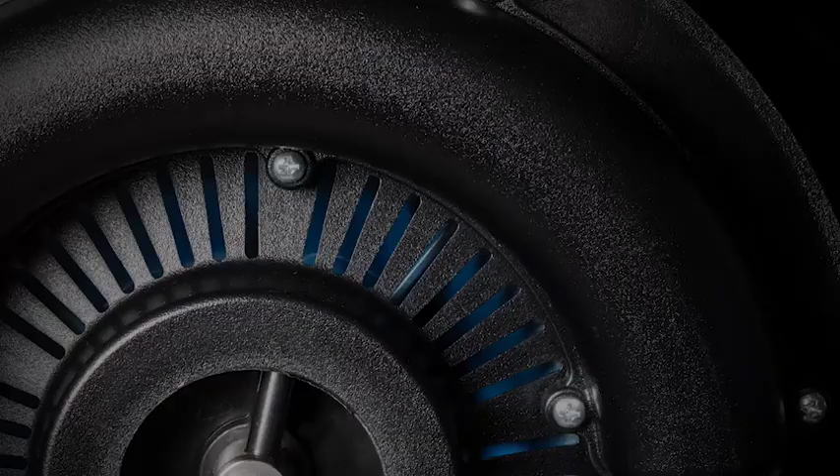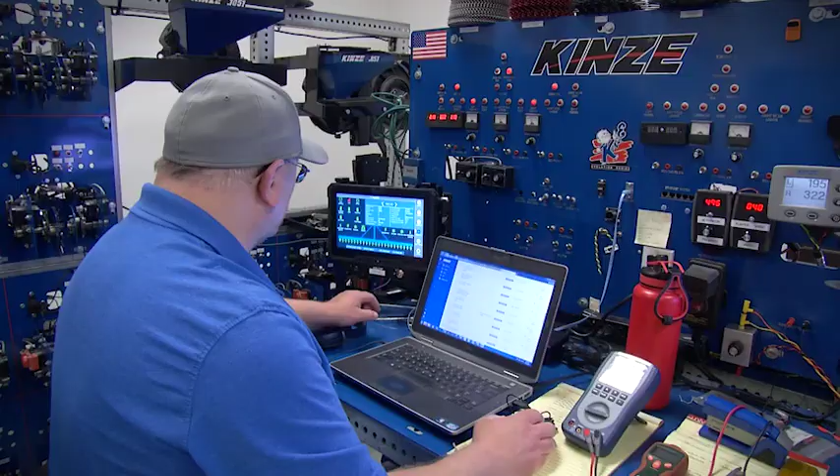They say necessity is the mother of invention, and nowhere is it truer than in farming. Farmers have always been on the search for a better way, noticing a problem and finding an answer. Generation after generation, more than anything else, innovation has to do with listening, then finding an effective solution. That's the foundation of KINZE.

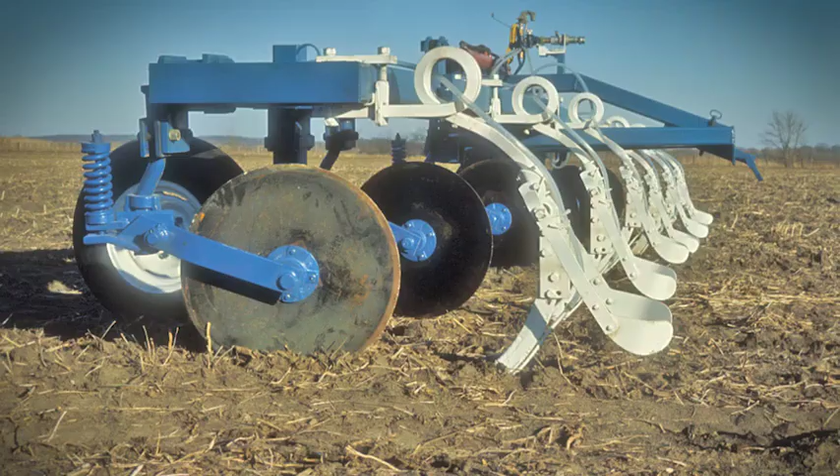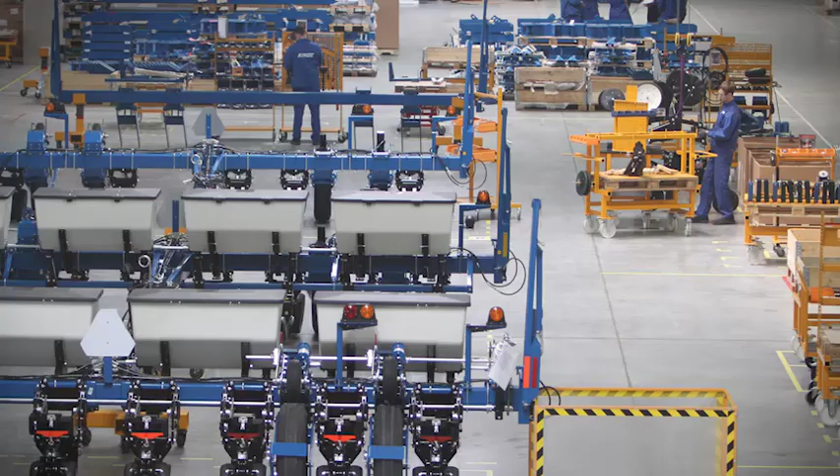It started with one man with a God-given talent to create, and a repair shop equipped with basic tools. But by listening to farmers' wants and needs and responding with smart and simple inventions, KINZE delivered better solutions to the farmer. Today, KINZE has grown to an international company, and it continues to carry on its founder's philosophy. Like most farms, it's still a family business.

Now, in the next generation of leaders, providing next-generation technology, while operating with the same core values it started with in 1965, conducting themselves in the highest ethical manner in all relationships, hearing the customer's current and future challenges, always asking, how can we do it better? Responding with creative breakthroughs, all in a culture that realizes people are the greatest asset.

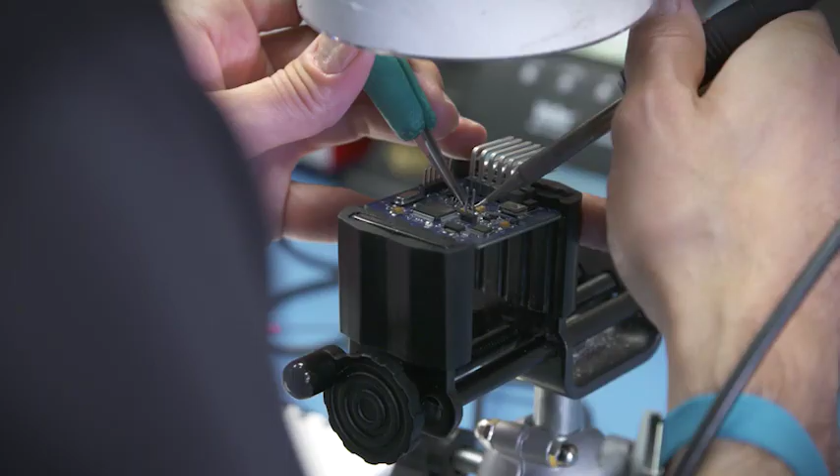Technology, ourselves, you name it, we push it. Join us on a special journey from what if to what is, where precision for every customer is personal. And see what can happen when an innovator and the company that's his legacy never stop asking what if. Because farmers won't either.

They started centuries ago, spreading seed on the open ground, then letting nature take its course. The first man-made planter invention? It wasn't really a giant step forward, simply a crude wooden and steel crafted tool to make it easier for the farmer to singulate seeds once again by hand.

Then they discovered the power and efficiency of horsepower and started pulling one-row planters through the field with mules or horses. When they hitched up a team of horses, they not only increased horsepower, but they also figured a way for two men to first mark the fields into 36 and 40-inch checkerboard patterns, then come back and plant each seed simply by pulling a latch that released the seed.

Everyone starts somewhere. For John Kinzenbaugh, it started in Ladora, Iowa, in a 1,500-square-foot building with a lot of small repair jobs, fixing broken hitches, loader frames, leaky hydraulic pumps, overhauling trucks and farm tractors, even something as simple as drilling a new hole for a hitch.

I had a guy that came in with a used piece of steel. It was a drawbar out of an old tractor, and he wanted a 1.25-inch hole drilled in it. And I took a brand new 1.25-inch drill bit and drilled a hole in that drawbar, which had some hardening effect. And I nearly ruined the $10 drill bit, and I charged him probably $5 for drilling that hole.

And I had one customer scold me for nearly ruining the bit and not charging enough to even pay for the drill bit. But within a month, those guys had brought back a tractor to overhaul and some other work, and we'd done around $500 worth of work for those guys. That's how work comes back to a small shop, is by word of mouth. One satisfied customer leads to another.

Within just a few years, KINZE Welding had expanded into repowered tractors. And to demonstrate them, they did custom anhydrous applications. That led to the development of a unique 13-shank anhydrous applicator and John's very first mass-produced product.

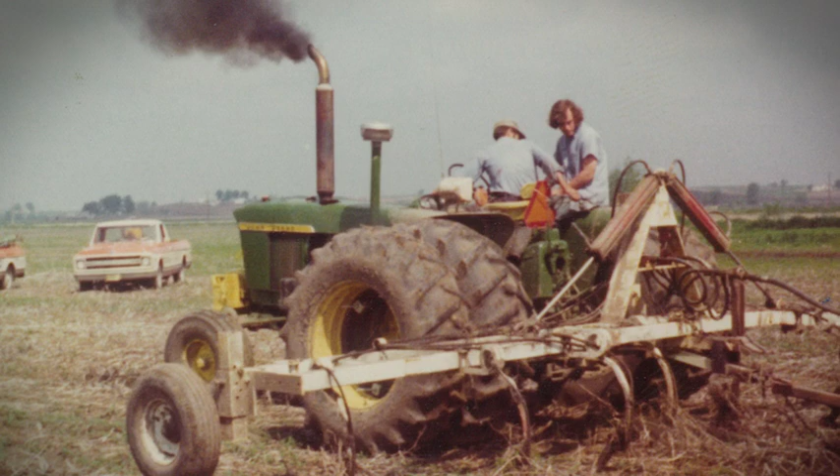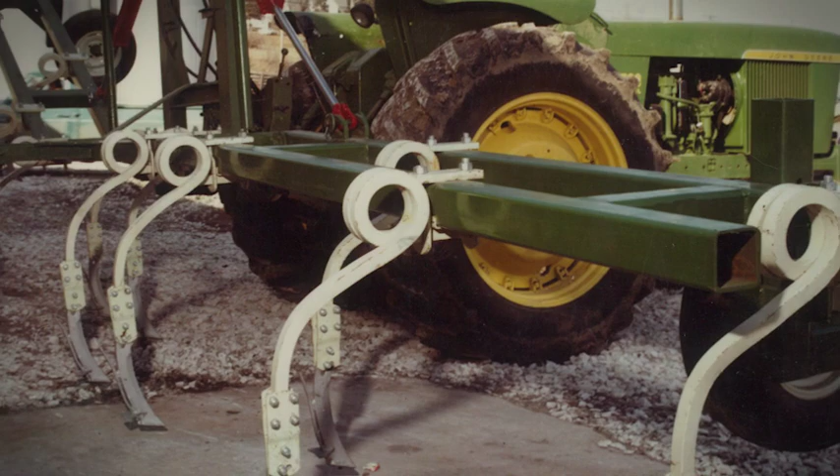As a result of the need for horsepower, the need for demonstrating the horsepower, we started custom applying anhydrous ammonia for the local fertilizer dealer. And we would go out and do 2,000 or 3,000 acres of custom application with one of the repowered tractors, and the 13-knife anhydrous bars that we built were unheard of in size.

One year later, John started focusing his attention on solving another customer problem: moving grain from the combine to the truck. A local customer needed a way of getting the corn away from the combine. His frustration, and others', was that in wet conditions they couldn't get the truck into the field, and if you were hauling corn any distance at all, four-wheel wagons were becoming too slow on the road. He wanted the ability to load his truck, which held right at 400 bushel, quick and easy, and keep it out on the road rather than in the muddy field.

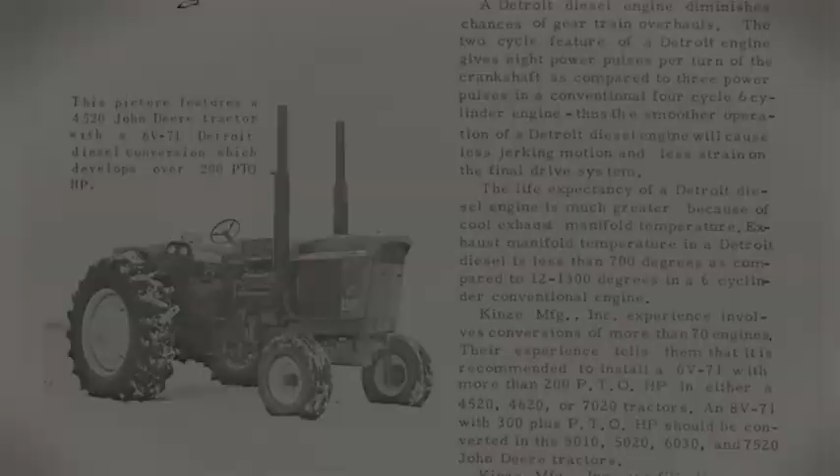As tractor horsepower increased, so did Jon's interest in demonstrating his popular repowers, this time with the John Deere 5020. The famous old way of demonstrating horsepower was to pull a moldboard plow.

So I went to Steinerson's here in Conroy and priced a new 7-bottom plow, and they wanted to know if I wanted a 16-inch cut or an 18-inch cut. I said, well, that's a good question. Ed Steinerson said, we don't need to decide whether it's a 16 or an 18 — we can order the plow in and set it up the way you want. I said, well, what do you mean? It has to have a longer frame, the backbone of the plow has to be longer.

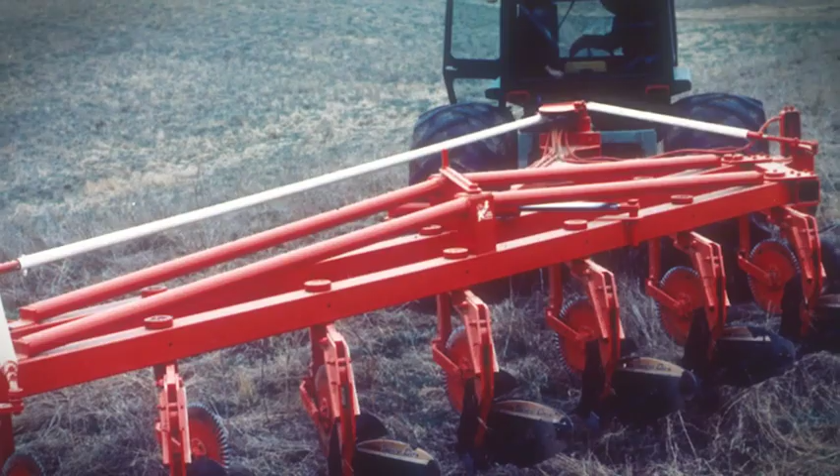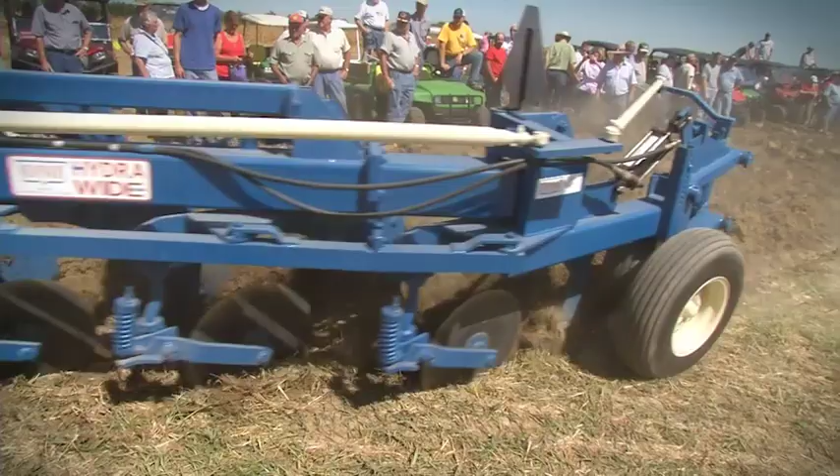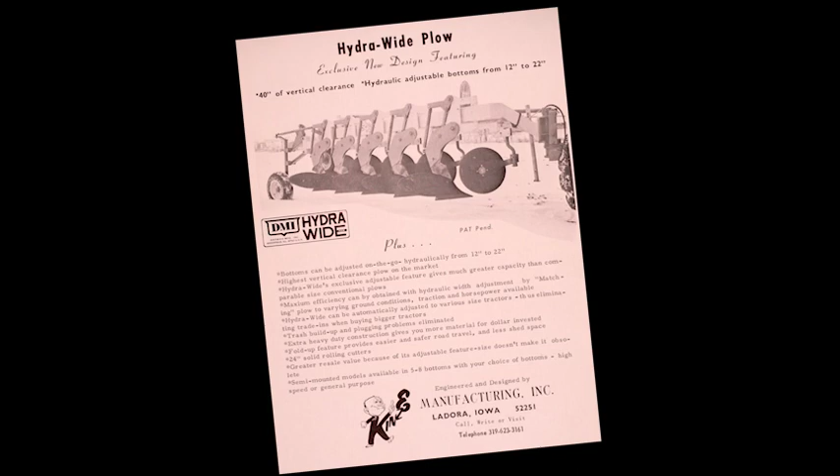He said, no, it's the angle that the bottoms are attached to the backbone that determines the width. And just like a light bulb coming on, it clicked into my mind that if we could pivot those bottoms without taking bolts out, but on a pivot instead, we could adjust the plow infinitely. I realized this was something that could be patented, and so my first patent was on an adjustable cut moldboard plow. In the summer of '71, I took the plow and drawings and pictures of it and went out and met Bill Dietrich for the first time.

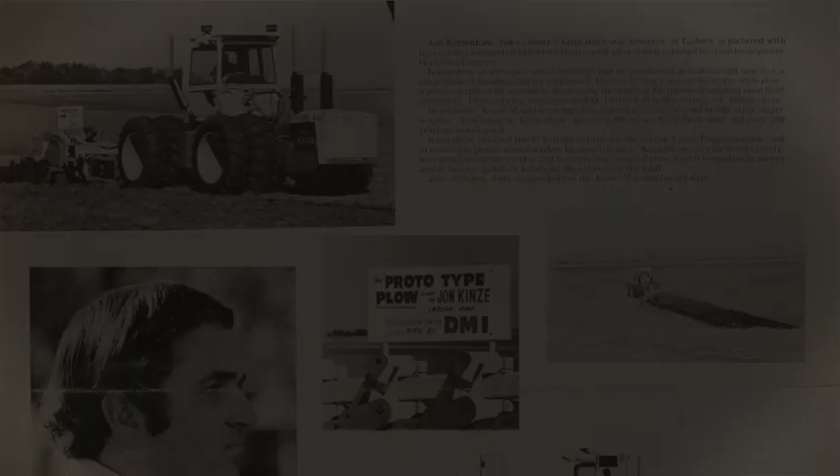One year later, Jon was back at DMI talking to Mr. Dietrich about 12-bottom plows and a lot more power. I sketched on a napkin at the restaurant how I would hook the two 6-bottom plows together — the front part was pull type and the back part was like a mounted plow that attached. He agreed that would be a good way to do it, and he would furnish the 6-bottom plow frames if I would join the two together. Then he right away wanted to know, what are we going to pull it with? I said, well, that's a good question. But jokingly, I said, you know, we could hook two 5020s together and pull it with two tractors.

In the fall of '74, I was getting close to getting it finished. I can remember two or three John Deere engineers came by the shop the week before the Farm Progress show, and they commented it sure would be a show stealer if we had it ready for the show. They didn't think there was any way it would show up at that Farm Progress show four or five days later, but it did.

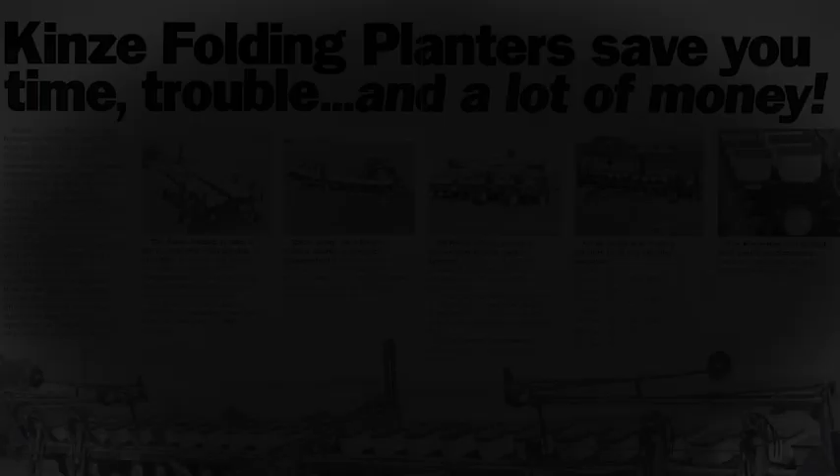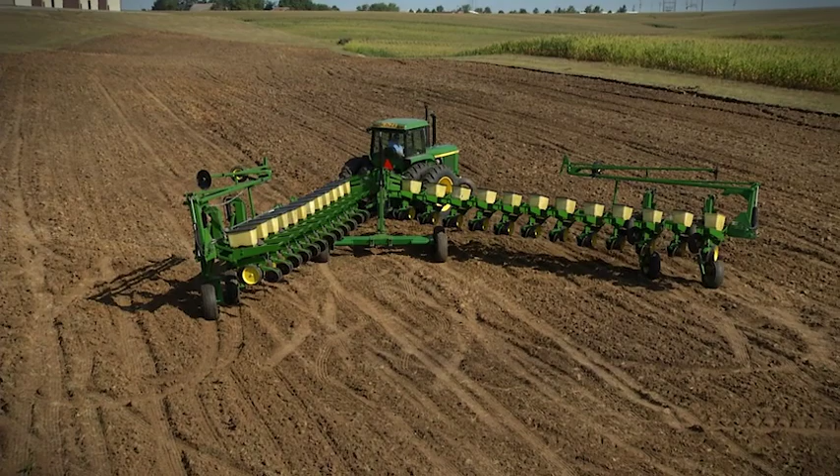The year was 1975, 10 years after Jon opened his 1,500 square foot welding shop. Planters were getting bigger, and no one had come up with a fast, easy way to transport them from field to field. In 1975, a farmer from southern Iowa came through and made a comment that somebody should figure out how to fold a big planter. The fact that you folded a planter up vertically was spilling seed and insecticide, and it just wasn't a good way to transport or pull a planter in most Midwestern fields. So I started looking at a way to take a 12-row or 16-row planter and fold it horizontally. It was clearly a need for that folding invention.

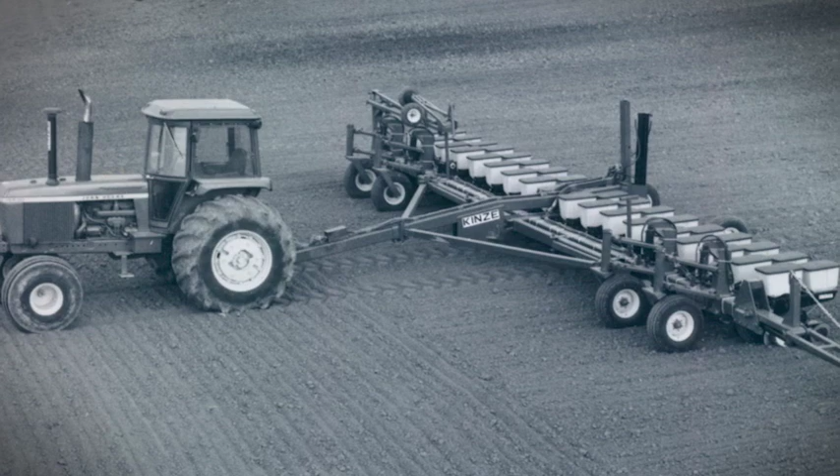By 1977, new John Deere MaxEmerge row units were setting the standard for accurate seed placement and depth control, and Kinze was mounting them on the majority of their newly patented rear-folding toolbars. But when Deere decided to limit Kinze's access to their MaxEmerge row units, and Kinze decided to build their own, that's when things really got interesting.

In approximately 1981, there seemed to be a need for smaller planters, and since we had solved the row unit issue and could build as many as we needed, we introduced 4- and 6-row planters. At that same time, it was apparent that narrow-row soybeans planted with a planter were much better than planting with a grain drill, so we developed what we called the double frame planter.

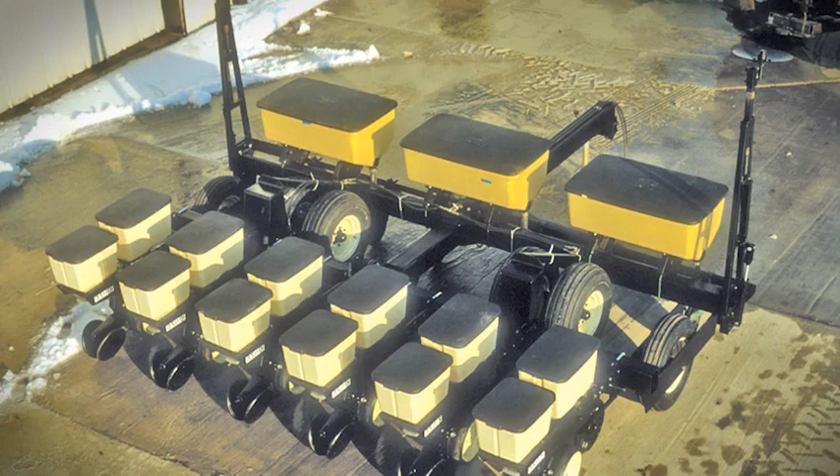On the back bar, it was wide open to have row units spaced as close as 15 inches. And then we could plant 15-inch soybeans with the same planter that we planted corn.

In 1983, it was obvious that we could use a better way of putting the interplants on the bar. We decided that we would stagger the rows.

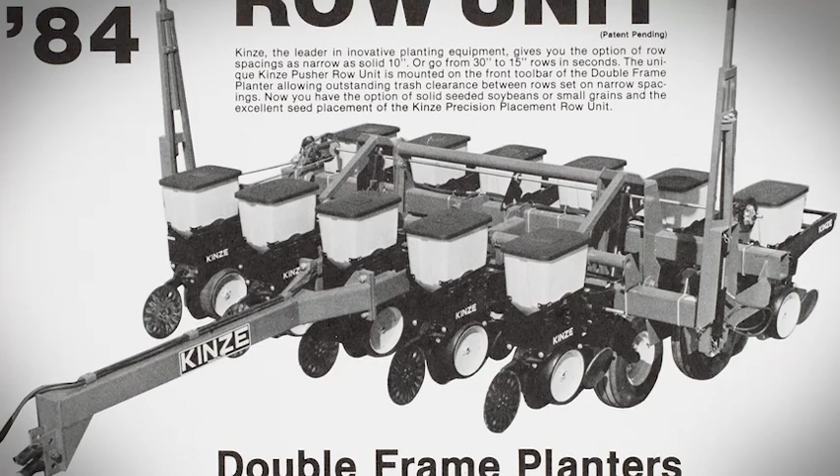It occurred to me a few days before the Farm Progress Show in 1983 that we could build that row unit and push it from the rear. The patent called it a rear-driven row unit, but it basically has the gauge wheels up front, and by putting the parallel linkage at the back side, we could push that row unit like you'd push a wheelbarrow.

It was a simple concept, easy to do. It was patented, universally accepted by farmers, and before long, it led to the next KINZE innovation, the pivot fold planter for 6, 8, 12, and 16-row toolbars.

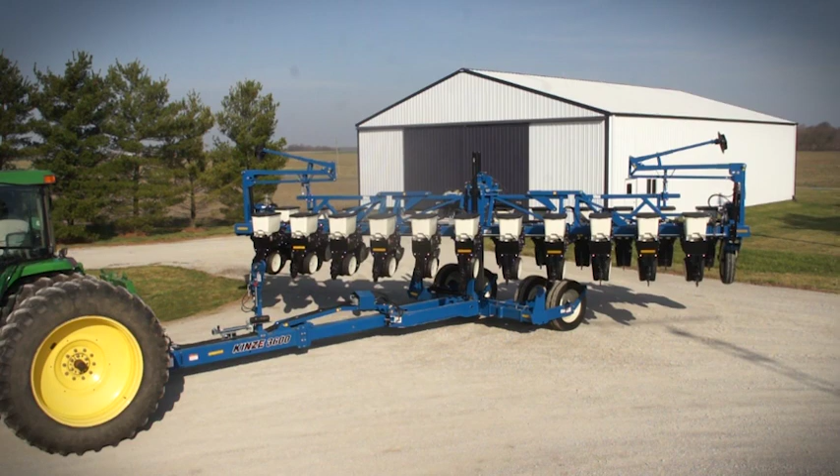So it occurred to me that if we could build the planter that would raise and one end rotate forward, the other end rotate backwards, it was basically a central rotation of the bar, and we could lock the frame rigid so that it did not flex.

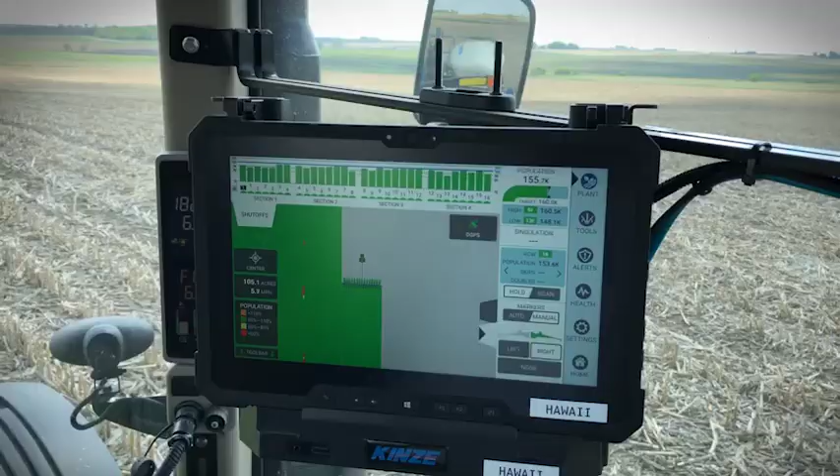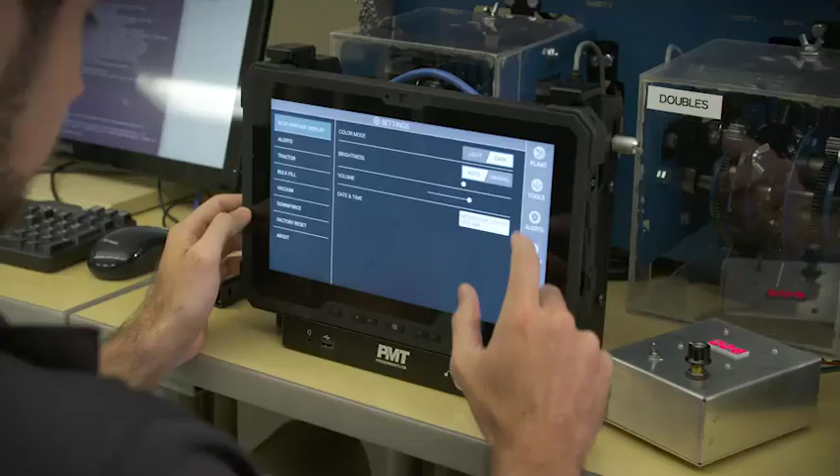KINZE innovation continues for the next generation. Our company is bigger and, dare we say, even better. A place where game-changing solutions are born, creating the next wave of cutting-edge technologies. Right here, right now. As long as there is KINZE, the gold standard will not be red or green.

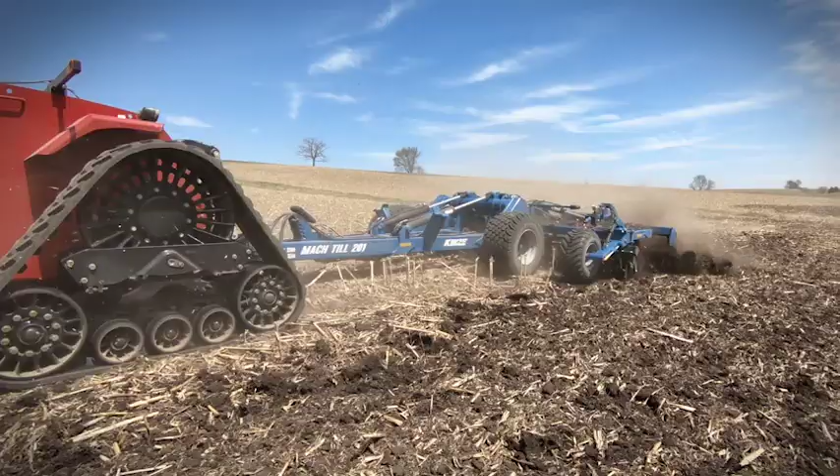Because precision isn't a paint job, precision is personal. Farmers inspire what we create today and what we envision for tomorrow. When they talk, we bring it to life.

When they talked about the shortage of skilled part-time labor, we were the first to debut an autonomous system in farming, using GPS to take grain from combines to awaiting trucks.

When they asked for a way to use their soil maps, we created the first multi-hybrid planter, using field data to plant different hybrids in the same field.

And when you deliver such world-class technology here at home, it's only natural that the rest of the world would come calling, which is why KINZE has a factory and dealer network to serve Europe and Russia.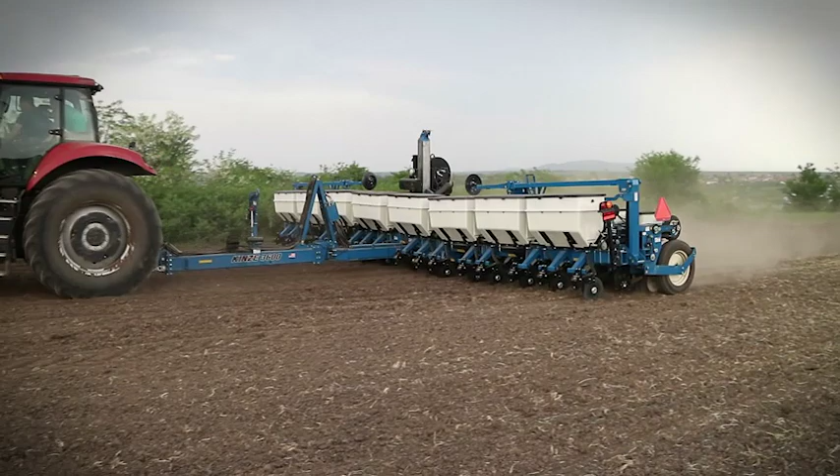And just like in the U.S., our approach is far from cookie-cutter. We're creating tailored, forward-thinking products that answer the specific needs of their farms and conditions, proving that KINZE innovation translates into any language. Its performance goes beyond borders.

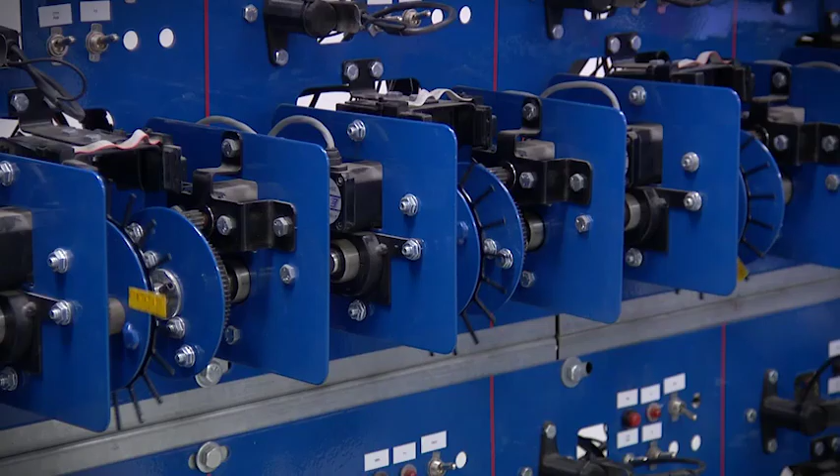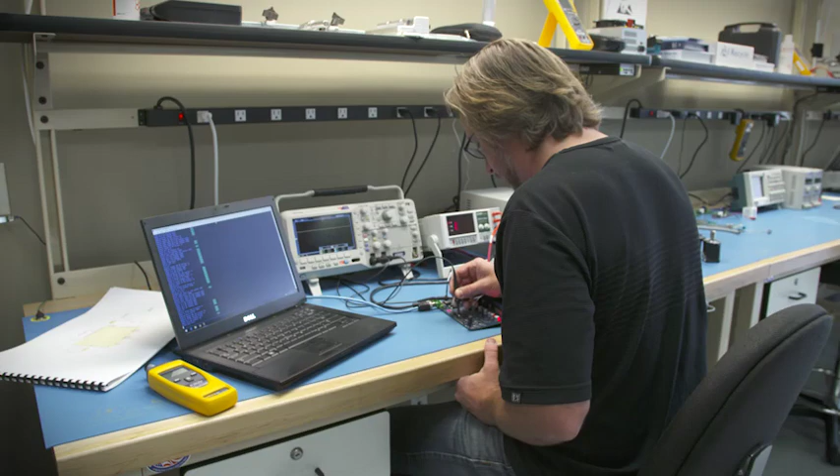And like the modern family farms we serve, we continue to expand, innovate, and evolve. We are innovators and collaborators who thrive in a culture of creativity, endless imagination, and strong values, making today's equipment smarter and intuitive for performance that's years ahead of its time.

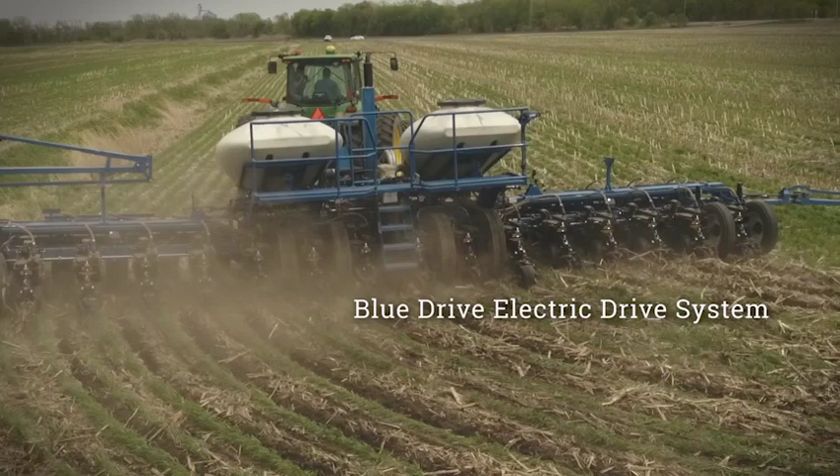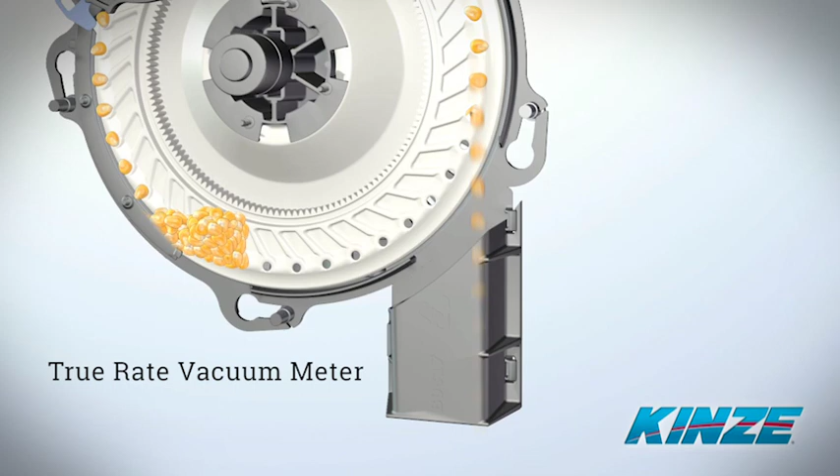Whether it's an intuitive in-cab touchpad that serves as your eyes and ears on the ground, nearly instant population rate changes, and consistent seed spacing across every row during turns, placing each seed with precision for highly accurate spacing and population control, plus true row-by-row downforce control for consistent seed depth and seed-to-soil contact.

A smaller, more agile grain cart with the dependability of the KINZE dual auger carts, or a 3-in-1 high-speed tillage tool to prep fields faster and better.

Innovation is the very fabric of our organization. It got us into the business and it keeps us at the forefront of ag technology. It's who we are as a company, that game-changing innovator in the marketplace where the industry is looking to us.

We live in a world of smartphones, big data, and endless connectivity. For the sake of our customers, we as a company will keep the same pace of innovation, creating smarter equipment that utilizes smarter software, where the farmer, his data, and his equipment are interconnected and working together to get the most from every acre using the least amount of resources.

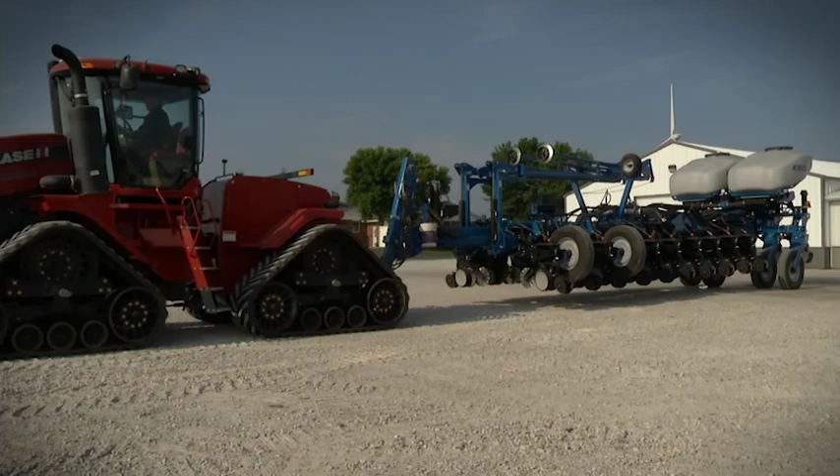We are the company that's doing it now, and we will continue to be that source of connectivity, efficiency, and productivity. It's all of our people who will continue to make it happen every day through our core values: listening to the customer, hearing their current and future challenges, responding with creative breakthroughs, achieving maximum quality, and working together as a team with our eyes towards the future.